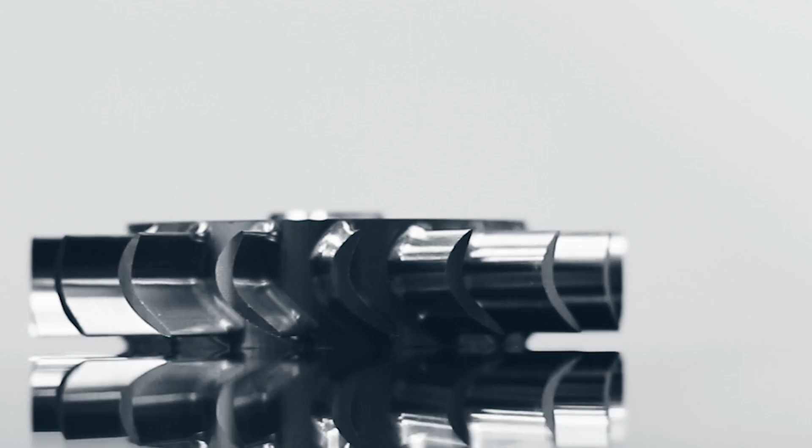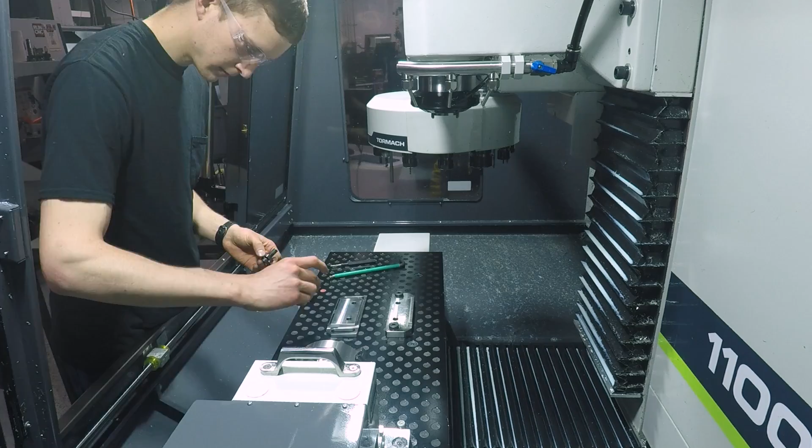For this part, we're starting out with a piece of 304 stainless steel round stock. In order to hold it for the first operation, we're going to dive straight into a set of Saunders Machine Works Mod Vise aluminum soft jaws.

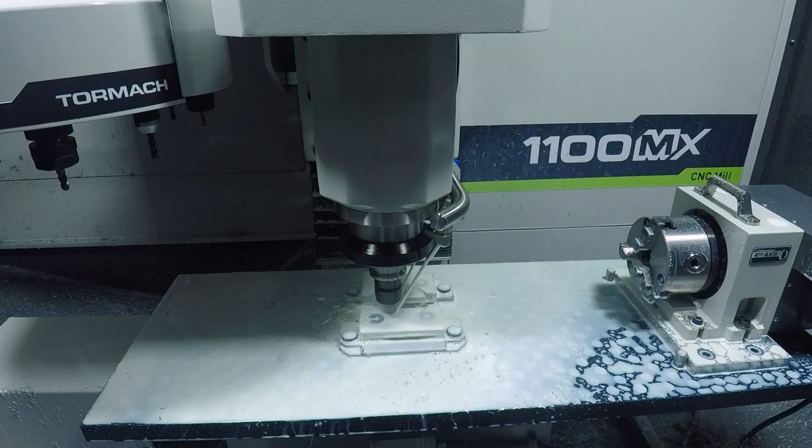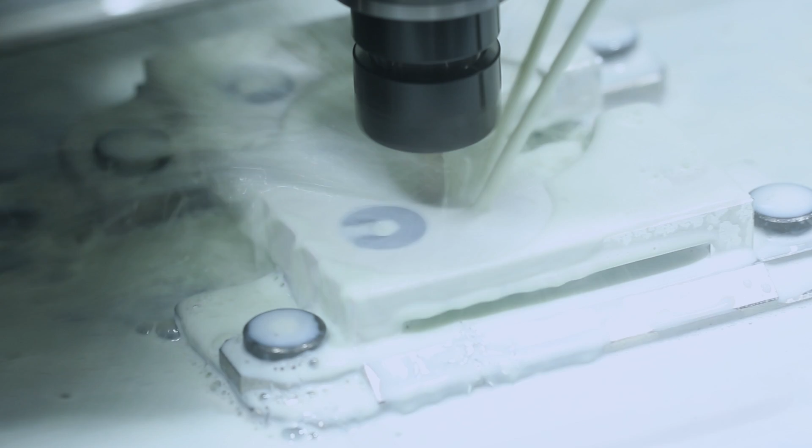So we start out with a 1/4 inch tool conducting a 2D adaptive operation just to clear the area. We follow that up with a 2D pocket to finish the floors. Then we come back with a 2D contour to finish the walls, and a 2D chamfer, just enough to knock the edge off. We're running some pretty conservative aluminum speeds and feeds here, nothing too fancy.

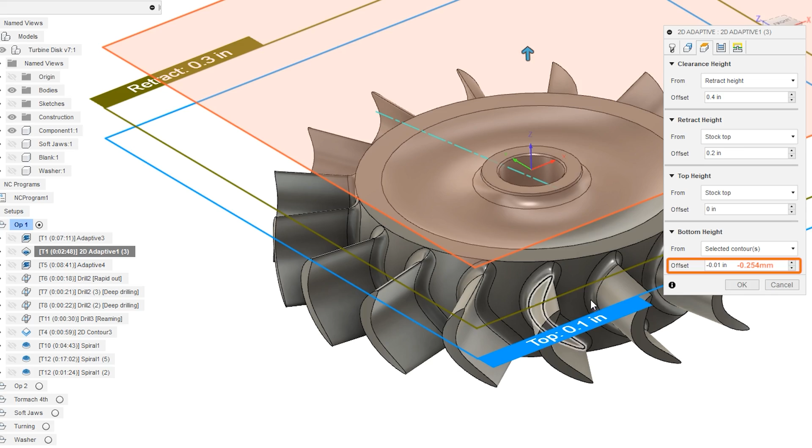For Op 1 of this part, we're going to dive right into a 3D adaptive strategy. Throughout this project, we use a 1/4 inch Lakeshore Carbide roughing end mill. It held up great and really took a beating. After that, we conduct a 2D adaptive operation that we programmed to be 10 thou below this finished edge. The reason why we do this is to give clearance for the finish end mill, and it will make sense when we get there in just a minute.

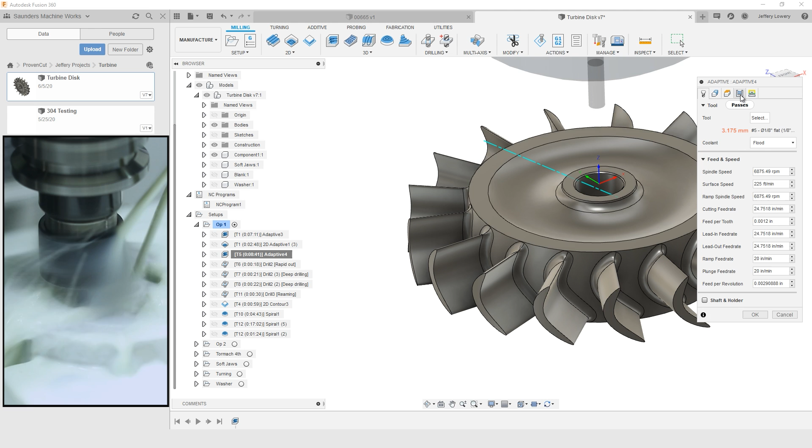Next up, we go with a 3D adaptive strategy for an 1/8 inch end mill. We're going to run this little guy pretty slow and have an optimal load of just 10 thou. We have a programmed axial stock to leave here of just 15 thousandths, but we really need to pay attention to how much is actually going to be left. We'll get to that in a minute too.

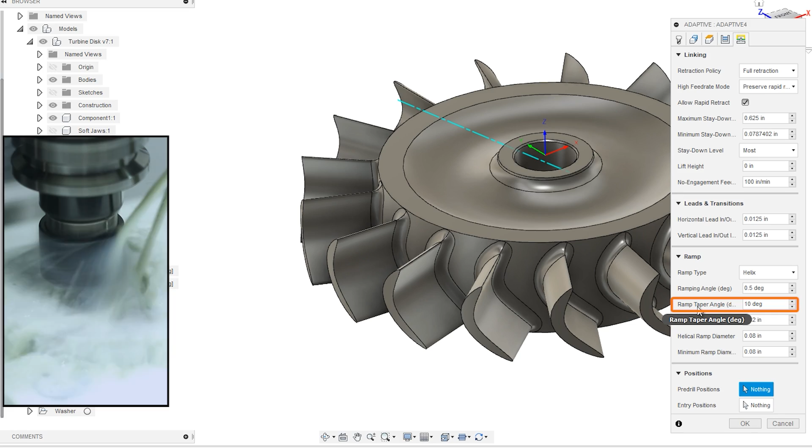An important input to note here is the ramp taper angle. We're machining 304 stainless steel, and 304 does not like to be rubbed on. If the flutes of your end mill are contacting the material without actually making a chip, without actually making a cut, then your end mill is going to wear out very quickly. The material is going to work harden, and it's not going to go well.

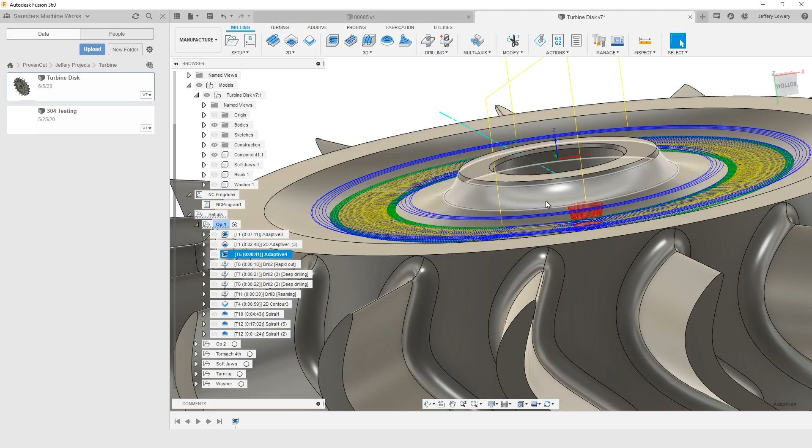Giving a ramp taper angle gives the helix a cone shape. This is really going to help with chip evacuation, prevent your end mill from rubbing, and ultimately create a lot more reliable cut. Next up, we are going to spot the center hole.

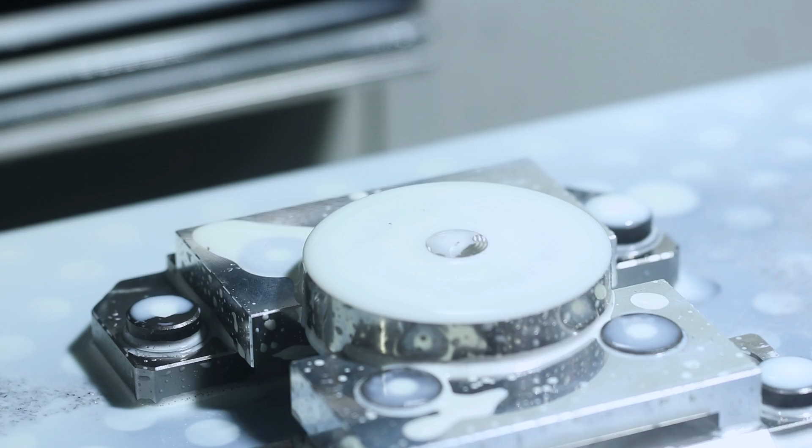For this, we use a 1/4 inch drill mill, and we run it pretty slow. Even with some pretty conservative speeds and feeds, the tip of the tool still chipped. Ultimately, a spot drill or center drill would have done a little bit better, but this got the job done for the one part we were making.

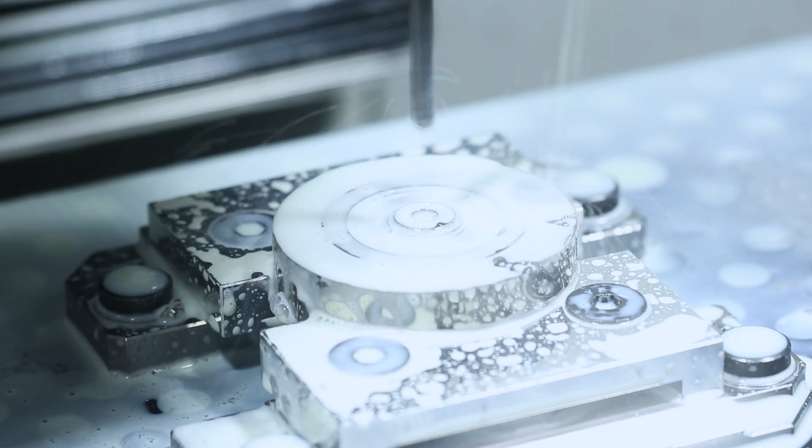For that, we use a carbide 1/4 inch drill running at 150 SFM, feeding at 5 thou per rev to drill all the way through the part. We follow that up with a high-speed steel twist drill, running that a little bit slower at 10 thou per rev, and it worked out great. That being said, I'm not confident high-speed steel is going to last a long time drilling 304 stainless. If we were running a bunch of these, I would certainly want a carbide drill and a carbide reamer.

But we came in with a high-speed steel reamer. We ran it at 1500 RPM, 7.5 inches per minute. The hole came out on size, and I was able to breathe a sigh of relief.

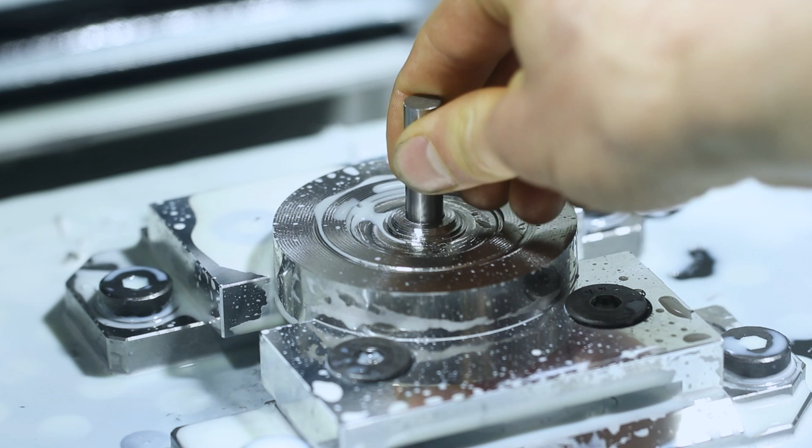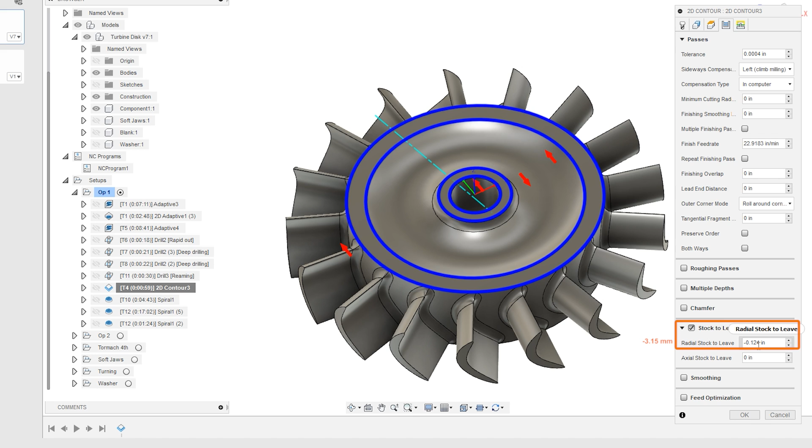So now we get into our first finishing end mill to finish the top surfaces of this part. We decided to use a 2D contour instead of a facing operation to try to avoid some tool marks. We just wanted it to be a continuous toolpath and try to create the smoothest finish possible. Within 2D contour, there's an option to leave stock. You can actually leave a negative value down here as well, up to the radius of your tool.

So we're using a 1/4 inch tool here. If we go -.125, it's red, but -.124 works great. This causes the end mill to run across the top of that face and clean up that top surface, just like we're looking for. So if you remember earlier, we were talking about the additional 2D adaptive strategy in order to make room for our finishing end mill. This here is where we need it.

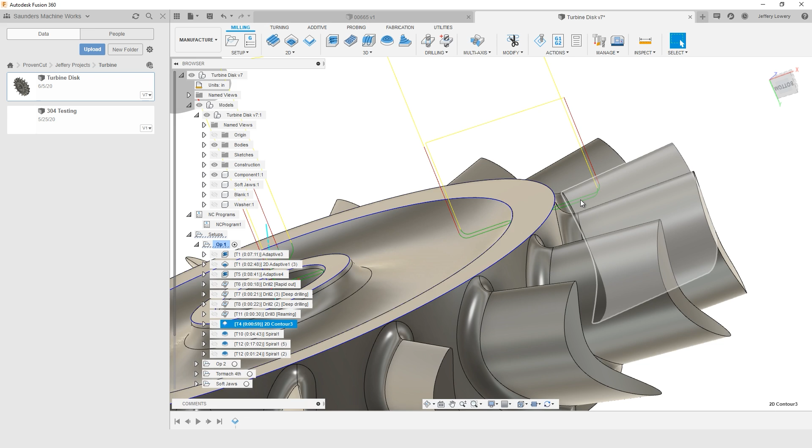This 2D contour toolpath around the outside of the part would have plunged right into the remaining stock if that 2D adaptive hadn't already cleared it. When working with a tough material like 304, you really have to be careful with stuff like that because that will quickly scrap your end mill. So before we jump into this 3D spiral toolpath, we're going to take a minute to look back at the 1/8 inch tool 3D adaptive.

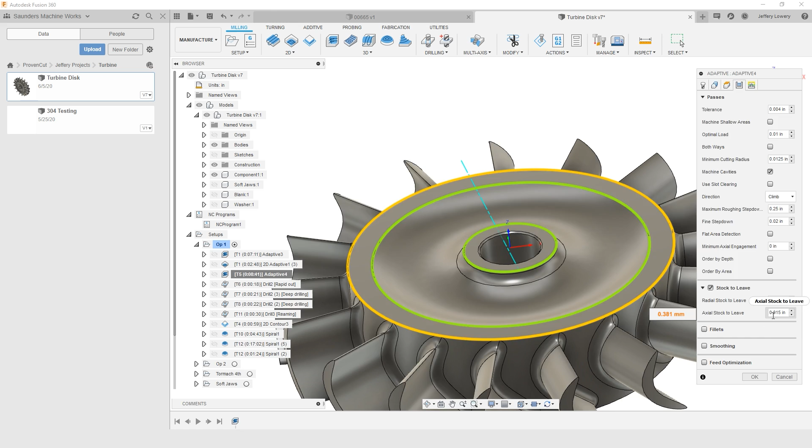Within that, we have 15 thousandths programmed for an axial stock to leave. We are using a square end mill to clear an area with a rounded bottom. So if we look at the simulation up to this point, we can see that the bottom of the stock that is still there is flat. This means that there is a lot more than 15 thousandths of stock still there.

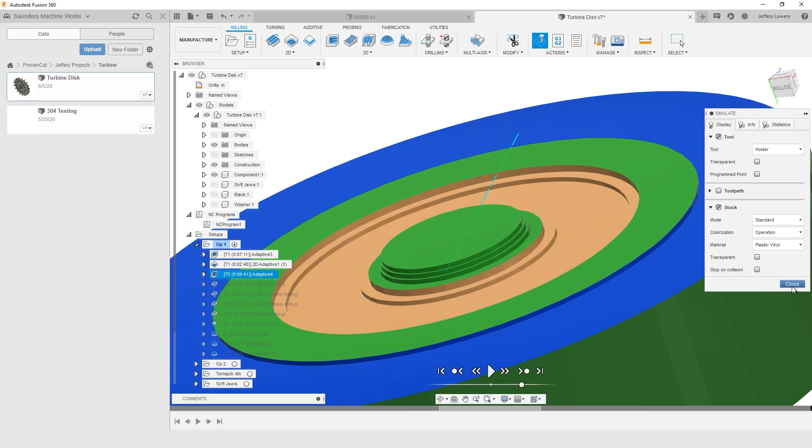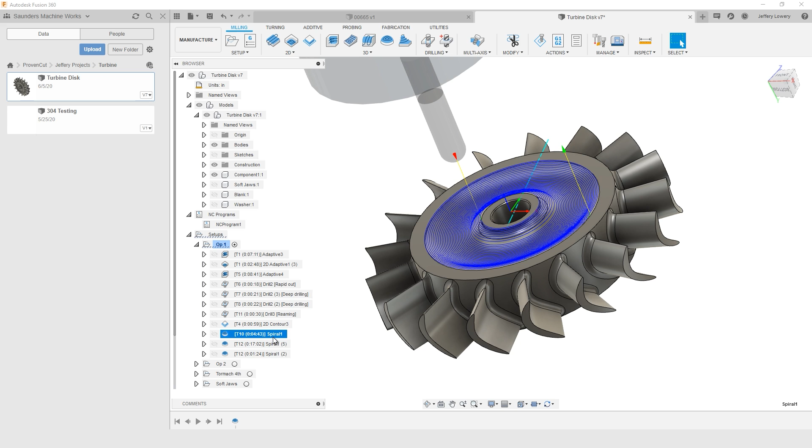Therefore, if we jump straight into our finishing spiral toolpath, we're probably not going to get a very consistent surface finish. It's going to wear out our finishing end mill and ultimately not give the results we're looking for. So we come down with a roughing 3D spiral toolpath. All that means is we're still going to leave some stock. We are using a 1/4 inch 4-flute ball end mill, and we have 15 thousandths programmed for stock to leave.

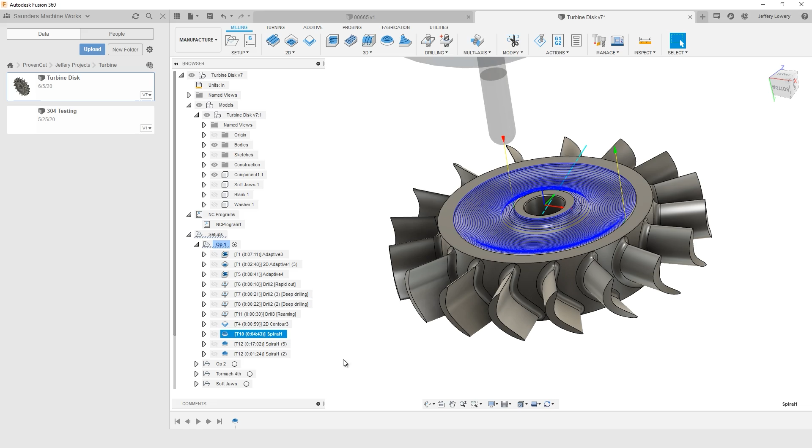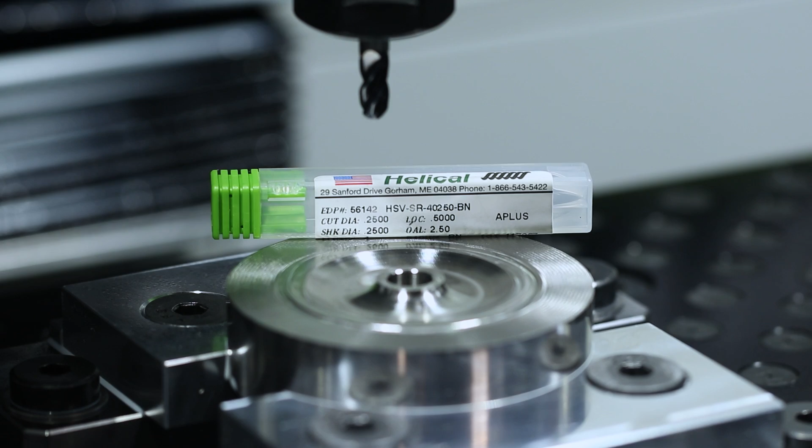This way, the 4-flute ball nose end mill is going to take the beating, clear the remaining material before our 6-flute finishing ball nose end mill comes in to leave the best surface finish possible. So with this initial spiral toolpath, we have a step over programmed of 15 thousandths. But when we get down to our finishing end mill, we're going to go all the way down to a 4 thou step over. We're really happy with the surface finish that this left. These Helical tools performed very well and the part looks great.

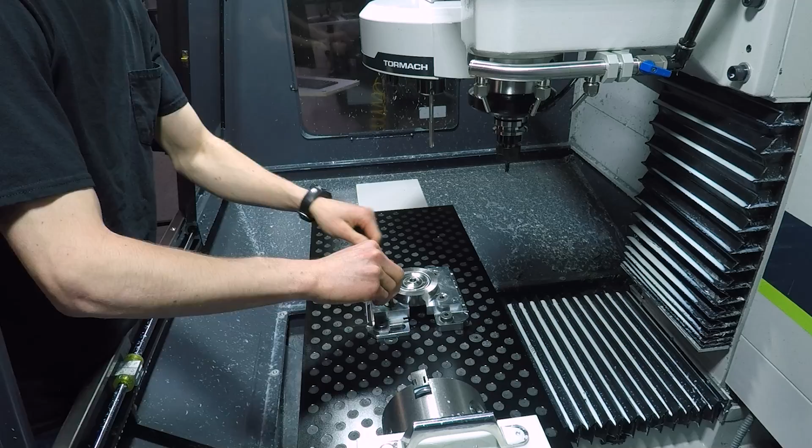Then for our final toolpath of the first operation, we use a 3D spiral toolpath to create the chamfer on the inside hole. We could have used a chamfer tool. It would have been faster, but we already had a ball nose set up. For only doing one part, we decided to go with a spiral toolpath. After the first operation, we're going to turn the part over, and the important part is that our two sides are parallel. Folks, this is where the real fun begins.

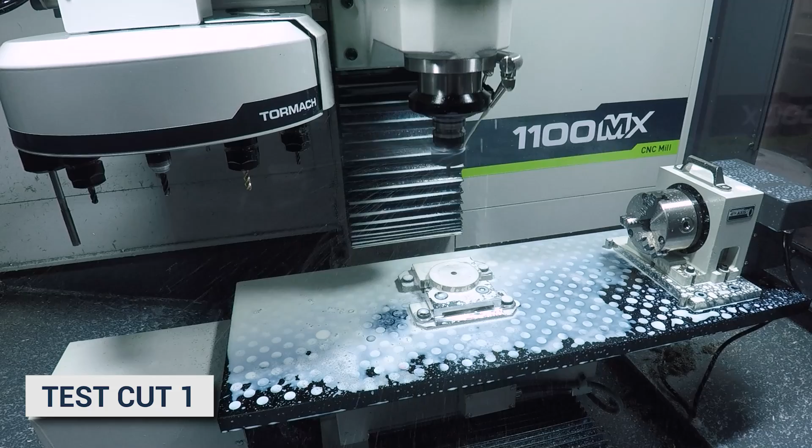So luckily, our piece of round stock was a bit thicker than the final thickness of our part. So we're going to set it up to do a test cut. When I set my Z offset, I set it to where the top of the material would clean up, but the part is still going to be quite a bit thicker than the final dimension. So after that end mill runs, we get out our 0 to 1 micrometer and we measure 2 points. Ideally, these two measurements would come out to be exactly the same.

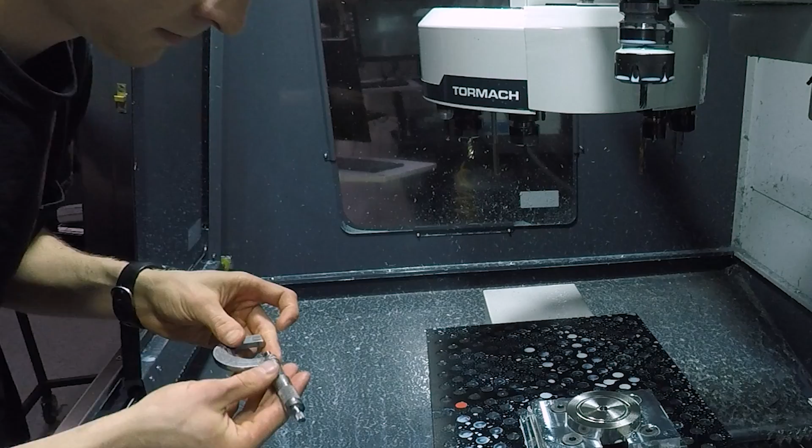Here, the measurement I took was about 2 thousandths difference, and for what this part is, that is not good enough. I think that the root of this problem started clear back in my setup for Operation 1. I seated it with a hammer. Ultimately, that's pushing the rough saw cut edge against the bottom of my soft jaws. Then the top machined surface is not going to be perfectly perpendicular with the cylinder of my raw stock, and I think it made it that much more difficult to set up for Operation number 2.

After we find that the parallelism is out, the fun game begins of trying to get it back. I take the part out of the mod vise, clean everything off, make sure there aren't any chips causing problems, get it back in, seat it, and then we're going to get out an indicator. I run an indicator across the top of the part just to start to try to understand what we're looking at, what we're working with.

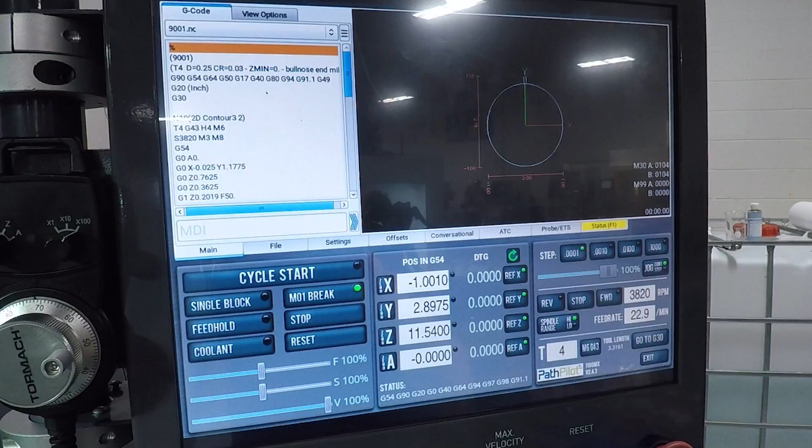Once we're ready to take our second test cut, I'm going to adjust the Z offset the same amount that the finishing end mill originally took. So if we look in our original 3D adaptive strategy, we were leaving 5 thousandths of axial stock. Therefore, when we adjust our Z offset, we're going to adjust it by 5 thousandths again. The finishing end mill is going to experience the same cutting pressure and hopefully give nice repeatable results.

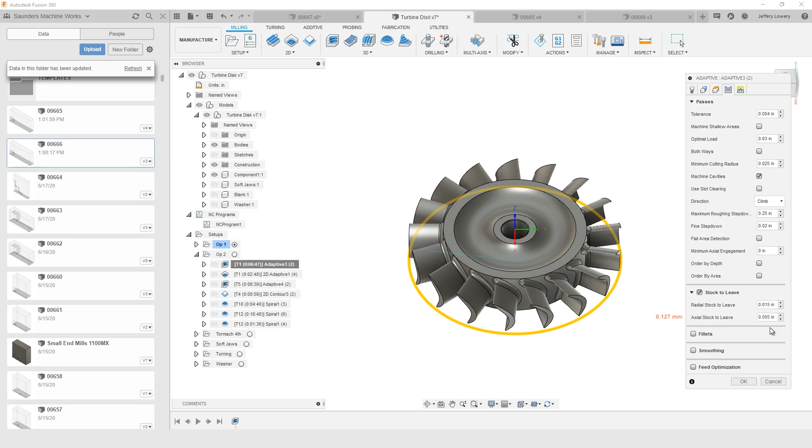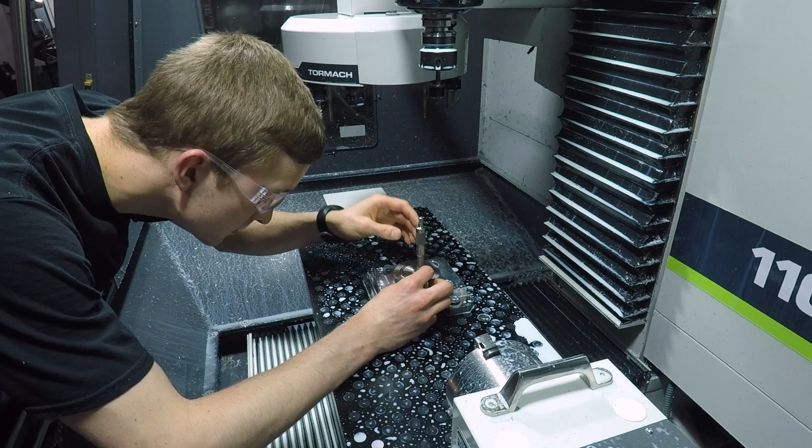Going into test cut number 2, I thought we were going to get the parallelism back to pretty close, but I was wrong. After I saw that it was still out by almost 0.02, I knew that for my next try, I was going to need to be a lot more deliberate about what I was seeing with an indicator. Therefore, I went ahead and pulled the part out again. I took measurements in 4 different spots around the part. I wrote them down, cleaned everything off, put it back into the mod vise, and then started indicating.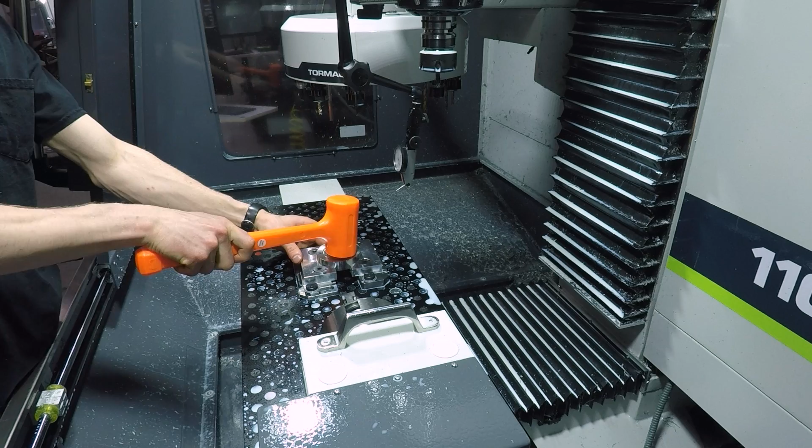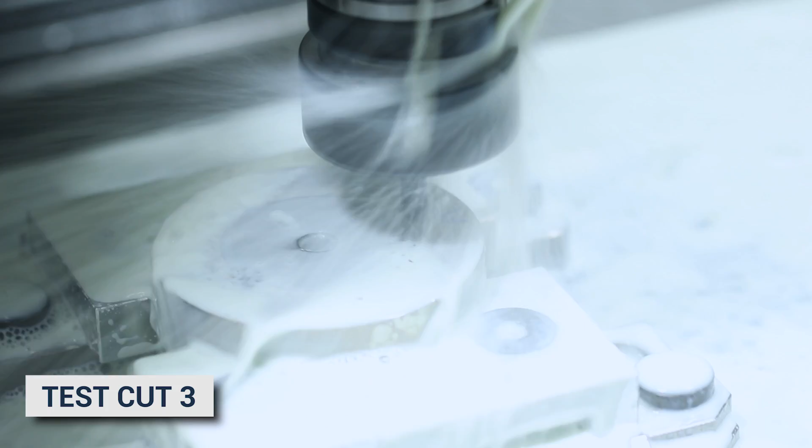I very carefully, very deliberately tapped on the part with a hammer in different spots to get the indicator to read high in the areas that were thick. I was able to get this dialed in to what I wanted to see, adjust the Z offset by 0.005 again, come back with another test cut. When I took 2 measurements after this 3rd test cut, the reading on the micrometer was almost exactly the same.

Just to double check myself, I went ahead and grabbed a different micrometer to take a measurement. I got the same reading, and from there I subtracted where I was from the overall thickness of the part on the drawing, and then used that number to adjust my Z offset and go ahead to dive into operation number 2. Operation number 2 uses the same programming techniques, the same strategies as operation number 1.

The tools held up, the surface finishes looked great, and overall we were very happy with how the part turned out. In the end, we were able to get the parallelism of this part to within 0.0005. So just for a reference, that's roughly 1/4 the thickness of a human hair.

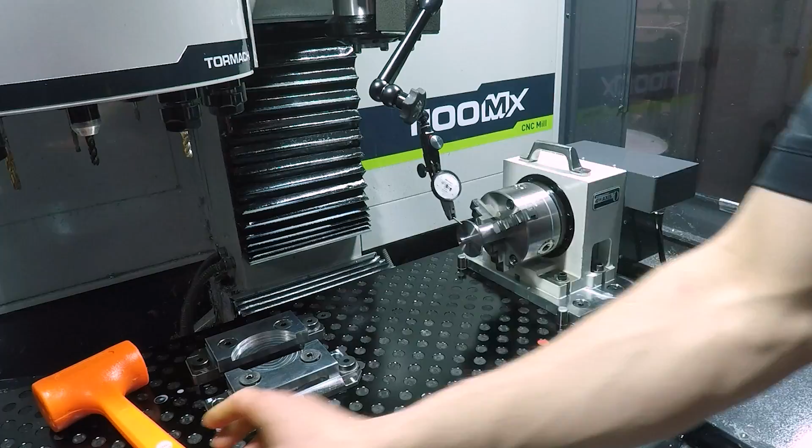After Op 2 is complete, we are ready to get this part up in the 4th axis. So we made a little fixture for this off camera, but the trick is getting the fixture to spin true in the 4th axis. So a tenths indicator, a hammer, and a little bit of patience goes a long ways.

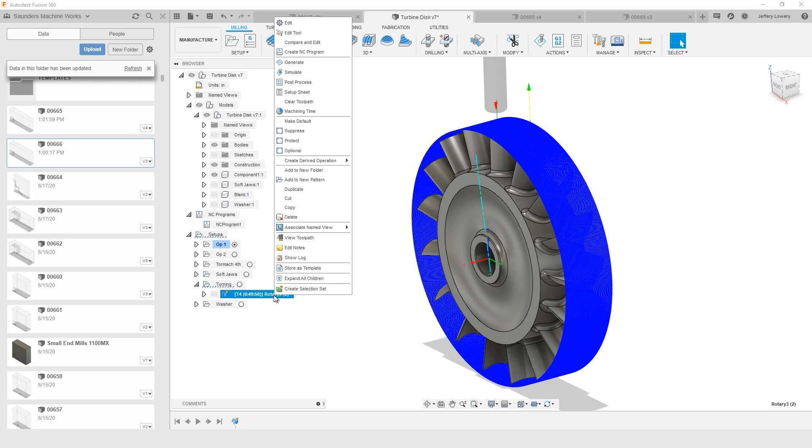In order to make the outside diameter of this part as round as possible, we decided to turn it in a mill. That is right, folks. We are turning the part in the mill. Fusion 360 has an awesome toolpath for this called Rotary. Rotary toolpath gives you the option to make a spiral toolpath of which you can adjust the step over, and it left a beautiful surface finish.

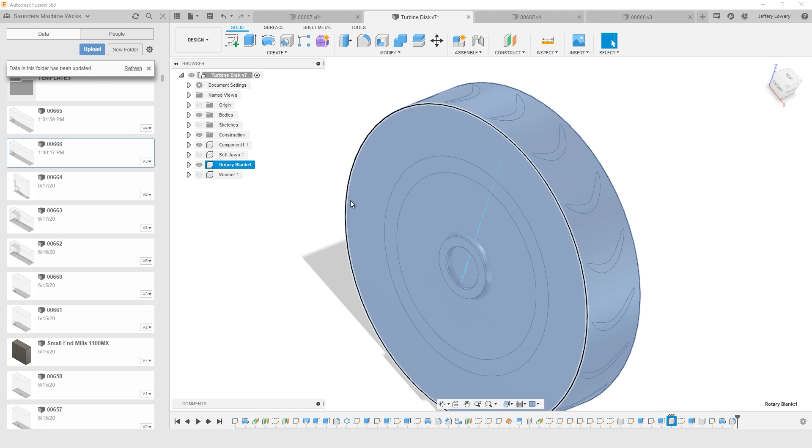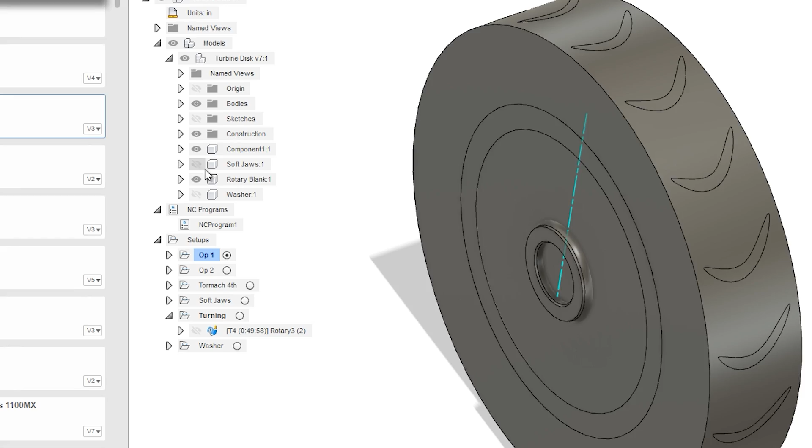In order to get Rotary to create the toolpath that I was looking for, we had to create a new component in the design side of Fusion. So we called this Rotary blank, and it is essentially just a solid disc to the finished diameter of our part. Then on the manufacture side, we created a new setup. Within this setup for the model, we selected our Rotary blank. A great feature within Fusion is I can now hide that model, and it essentially still looks the same as if I'm working directly with the actual 3D model of my part.

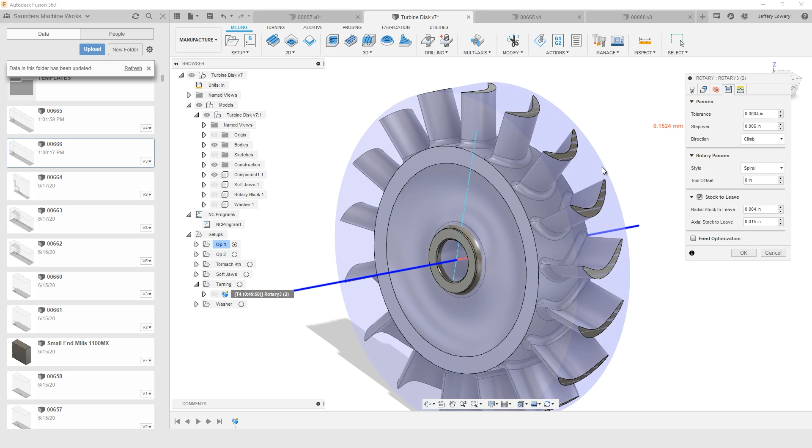So we did some experimentation and decided that a step over of 0.006 would give us a good surface finish and still keep our cycle time at a pretty reasonable rate of just 50 minutes. After we get the work coordinate system set up on this part, dialed in, we are still going to take a test cut. Folks, anytime you're trying to hold tight tolerances, test cuts are your best friend. So we take the test cut, we measure it, we see where we're at, we know where we're supposed to be, we can make an adjustment from there.

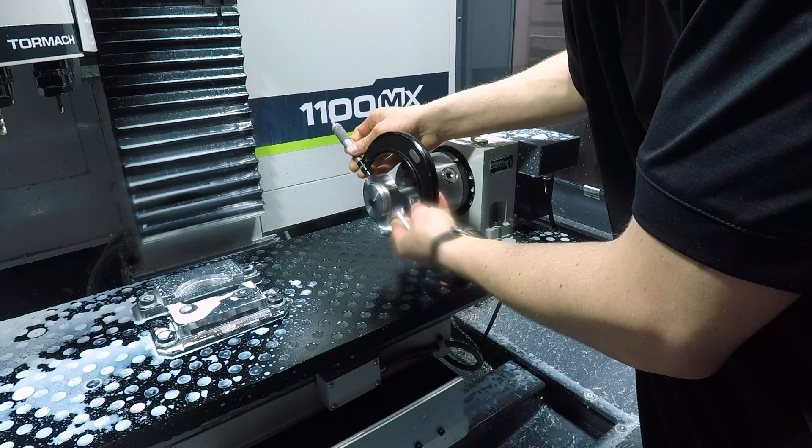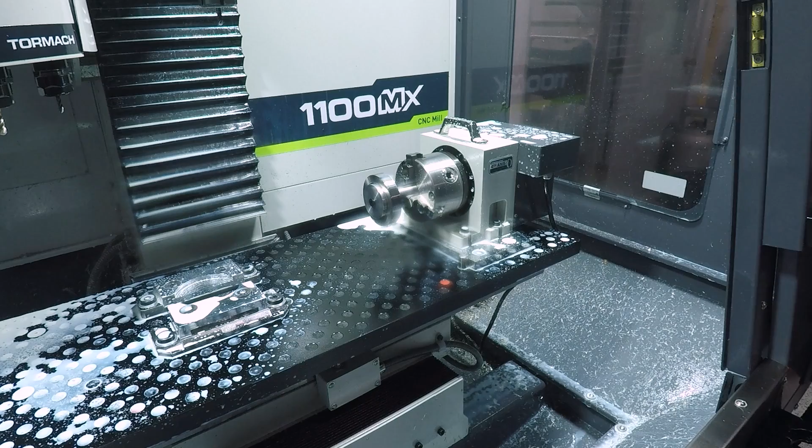With this setup, I was changing the diameter of our part with the stock to leave of the Rotary toolpath. We got it dialed in and hit our tolerance right on. By spinning the part in the 4th axis like we did, the circularity of it is right on. If you measure this with a micrometer, multiple points around that outside diameter, you will get the same reading. Folks, this 4th axis is awesome.

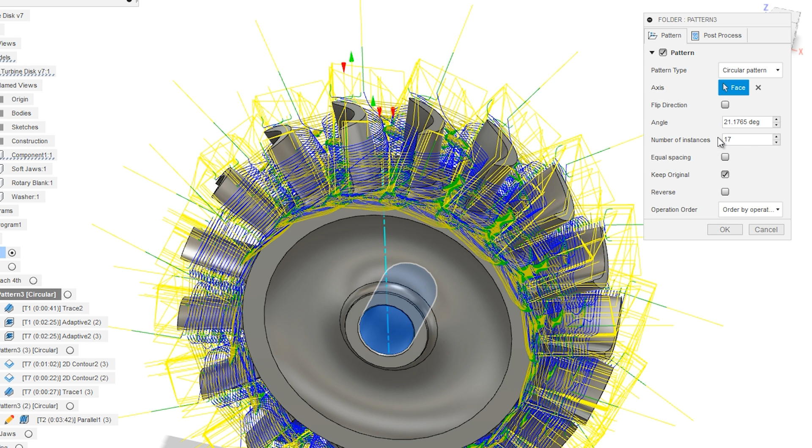After the Rotary toolpath, we are ready to jump into the biggest challenge of this part, machining these little fins. Within Fusion, we've programmed this as a circular pattern. You can get to that under Setup and New Pattern. Within a pattern, you have the option to select a circular pattern, an axis of rotation, an angle of separation, and a number of instances. This worked out really well for what we were trying to do here.

So we start out with our 1/4 inch Lakeshore Carbide roughing end mill. We're going to slot in between these fins in order to initially clear some material. I originally tried just coming in with an adaptive strategy, and that long length of cut was giving me a lot of problems and making some horrible noises.

In order to conduct a slotting operation between each one of these fins, we start out by creating a sketch and an axis of which we want our tool to be oriented. So we come over here with a trace operation, and for that trace geometry, we select the sketch, and then we have a tool orientation option to where we can select the axes that we created for our Z, and then we just select the inside cylinder for our X axis.

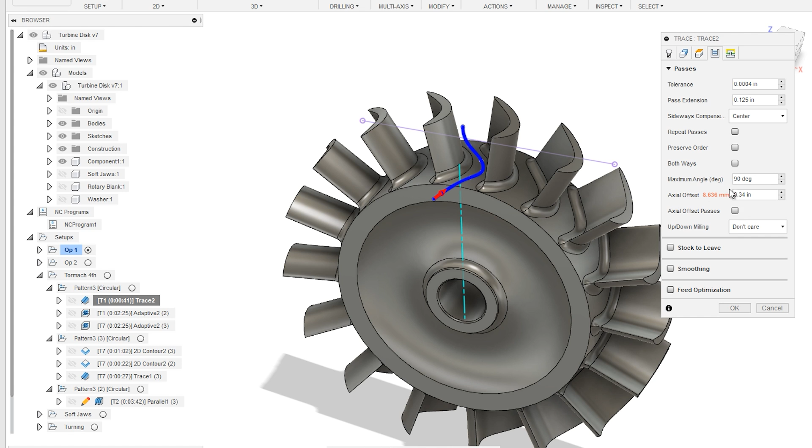From there, we use the axial offset to adjust the toolpath just right to where we're removing as much material as possible without getting into the part. Under our simulation, we can make our stock transparent, and it really helps get a good idea of where we're at.

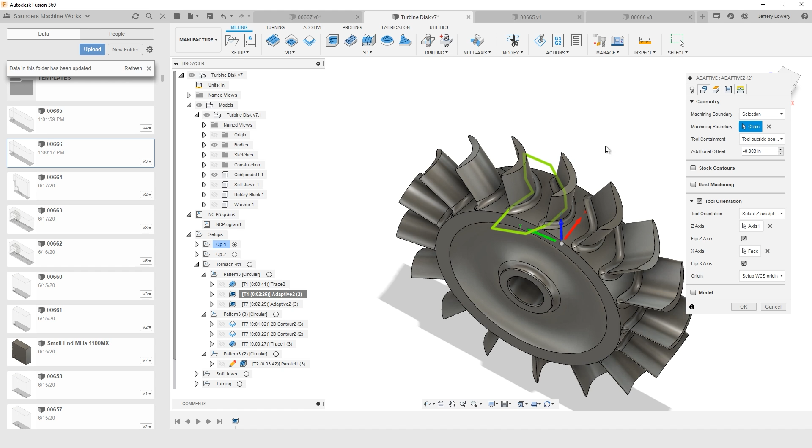Next up, we use the same tool to conduct a 3D adaptive strategy where we've created a sketch for our machining boundary that covers the area in between the two fins. We have the same tool orientation option to where we can select the same axes and get a great looking toolpath.

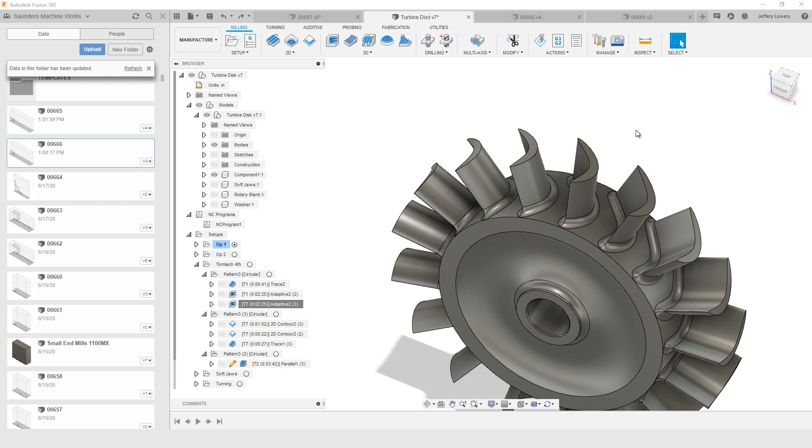After the 3D adaptive with the 1/4 inch tool, we follow that up with a 3D adaptive with a 3/16 inch tool. When you look at the simulation for our 1/4 inch tool, we can clearly see that not all of the material is removed.

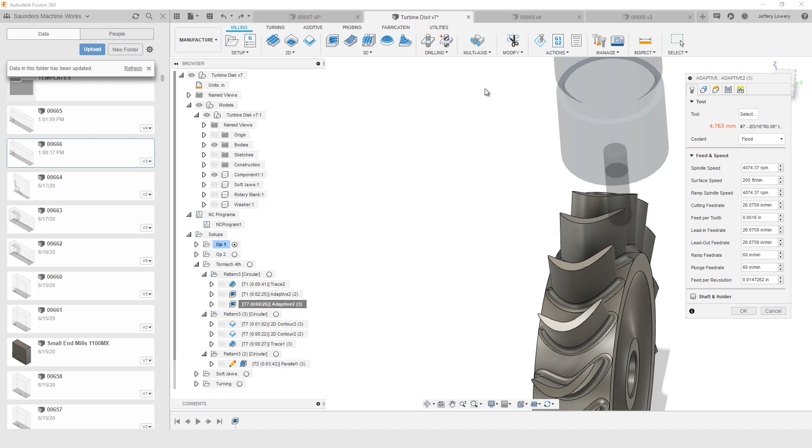We can then come back with a 3/16 inch tool, the same strategy, the same geometry, but we're able to select rest machining from previous operations. 3D Adaptive is so intelligent that it can look at your previous operations and create an appropriate toolpath based off what still needs to be removed.

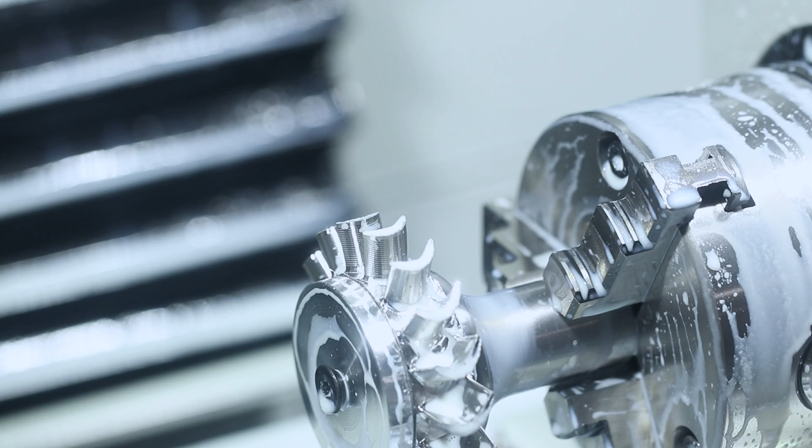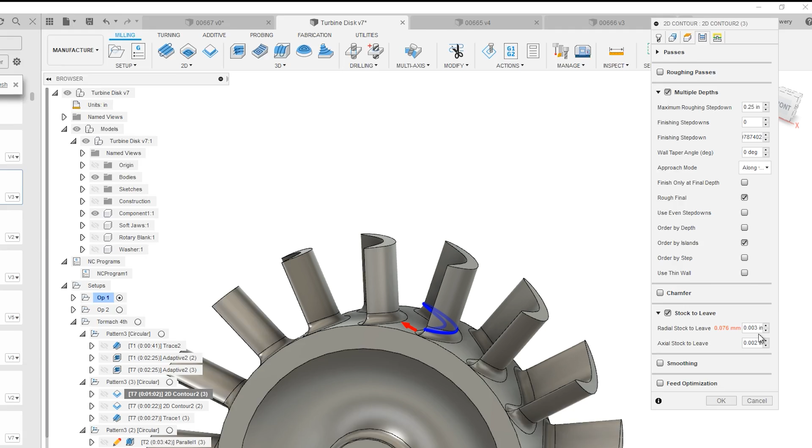After the 3/16 adaptive strategy, we are ready to jump into finishing these fins. We're going to orient the tool parallel to the fin itself by selecting the side of the fin for our Z axis under tool orientation. So we're going to start out with a 2D contour and still leave a radial stock of 3/1000. We're doing this to clean up the rest of the material left from the adaptive toolpaths. That way our finishing tool experiences a nice consistent tool pressure and will leave the best finish possible.

We also found that this first 2D contour was best conducted with 2 step downs, so we're not taking quite as long of an axial depth of cut. Because of the diameter of this tool, the relatively long length of cut, and the properties of 304 stainless steel, this was fairly difficult to get a good surface finish. I did some testing and I was pretty confident about our speeds and feeds recipe going into this, but the geometry of the part gave us some trouble.

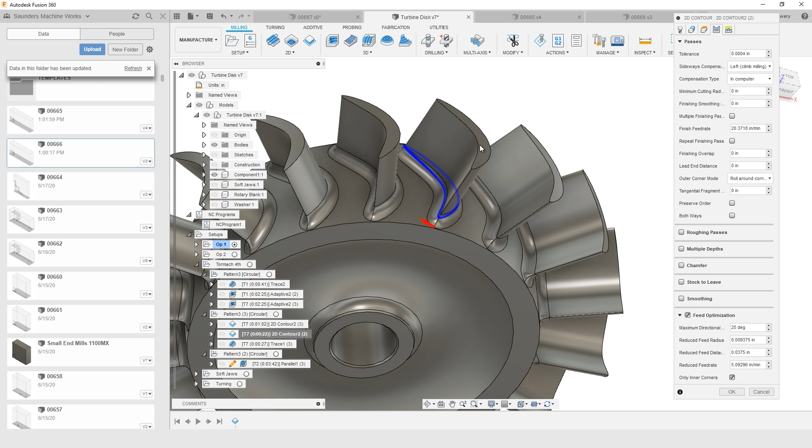So on the inside radius of that fin, the end mill experiences a slightly higher chip load and it was causing a small amount of chatter. If I could go back and do it again, I would spend some time experimenting with the feed optimization feature and try to get rid of that small chatter. Overall, the finish still looks great and we'll remember that for next time.

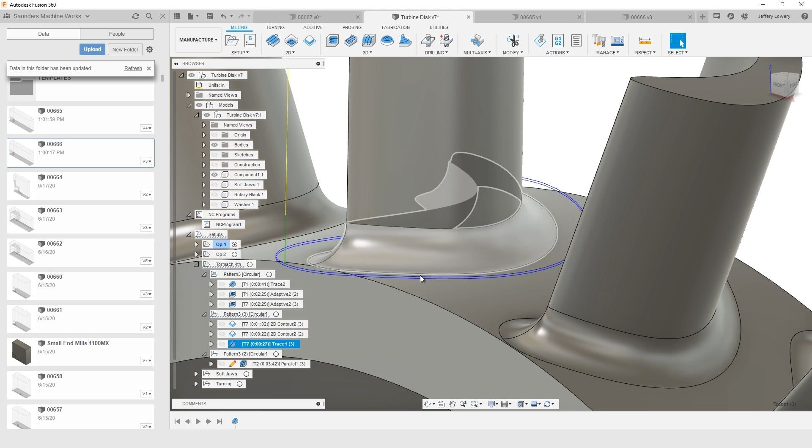After the 2D contour, we come back with a 2D trace operation in order to accurately machine the bottom radius around the flange. As you can see, a 2D toolpath is just not going to accurately machine these features. Under a trace operation, we selected the bottom edge of that radius for the curve selection. This created a toolpath that accurately machined that radius around the bottom of the fin. Again, we got just a small amount of chatter on that inside radius, but overall we were very happy with the surface finish on these fins.

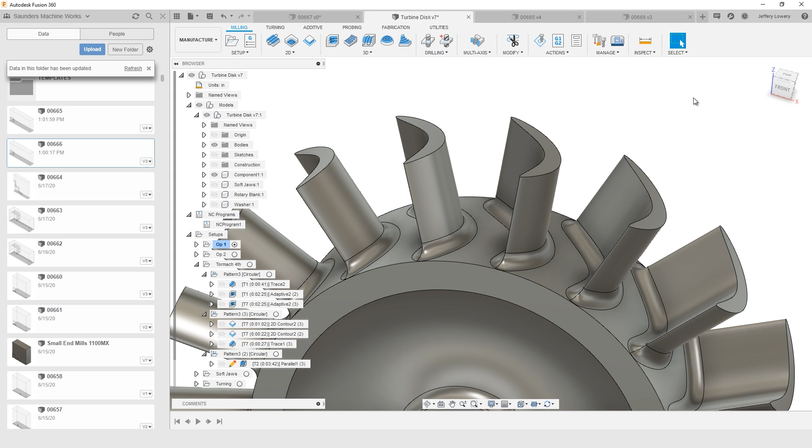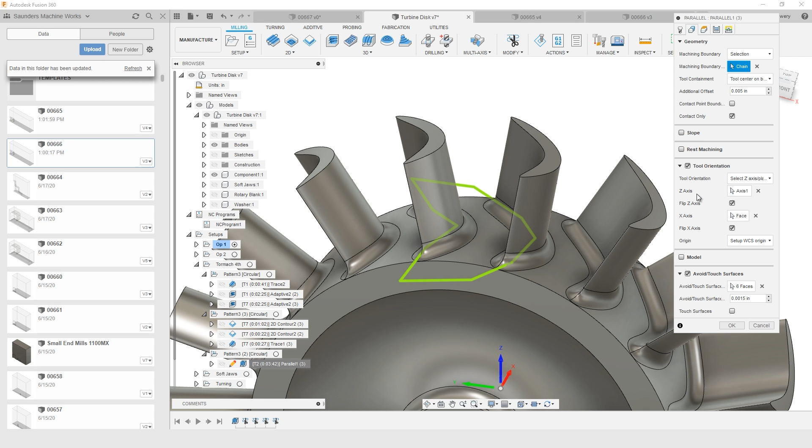Last but certainly not least, we dive into the 3D surfacing of this part between the fins. In order to do so, we use a 3D parallel toolpath and 1/8 inch ball nose 4-flute end mill. We were able to use the same sketch and the same axes for tool orientation that we used earlier for our adaptive toolpath. In order to get this parallel toolpath to look exactly the way we wanted, we were able to use one of Fusion's latest updates, Toolpath Trim.

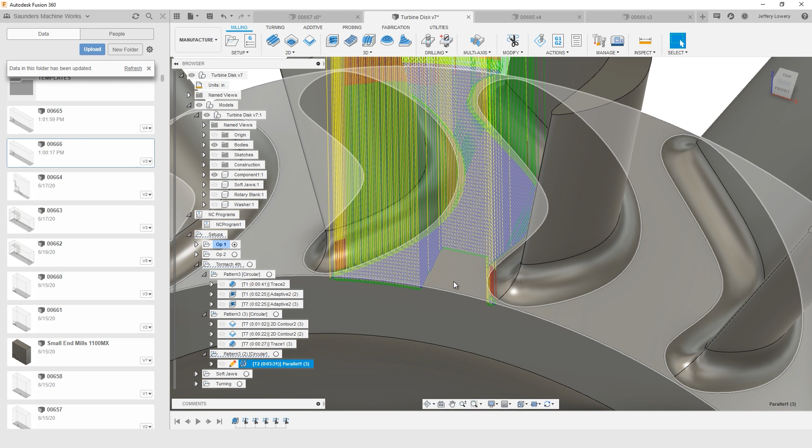What this allows you to do is to define a boundary for your toolpath to avoid. So we'll just do a little example here. We sketch a boundary, hit OK, the toolpath regenerates and avoids that area. This is really helpful to really get the toolpath dialed in just the way you want it. So we'll hit Control Z to undo that and then talk about why we decided on 3D parallel.

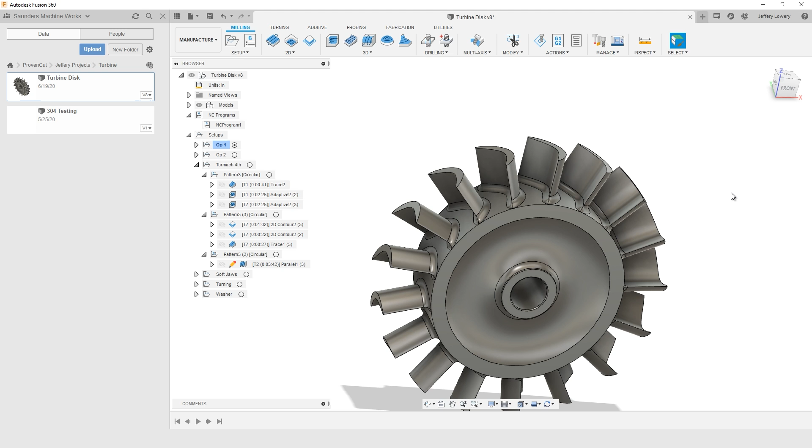While conducting tests for this part, I experimented with several different 3D toolpaths. Ultimately, I found that reducing the quantity of axes moving at any given time was going to give the best surface finish possible. So folks, even if you're dealing with a much more expensive, higher end machine, the machine is still not perfect. So it is generally a good programming practice to choose a toolpath that reduces the number of axes moving. For this geometry, we can clearly see that 3D parallel does that for us by watching our simulation.

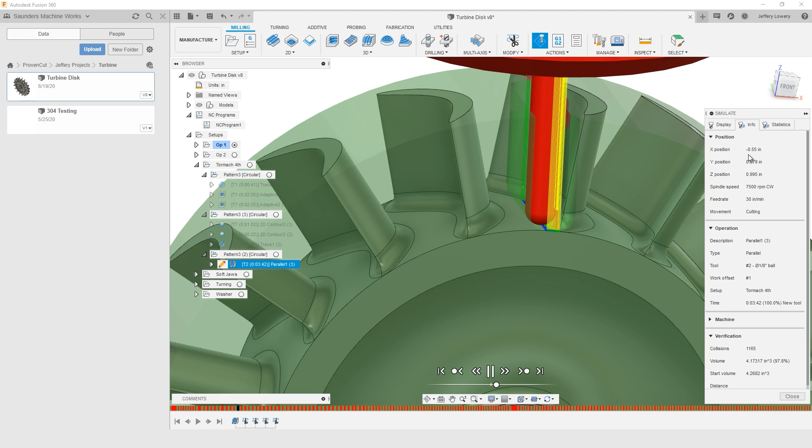The toolpath is moving multiple axes as it comes up and over and re-enters the cut. But we can see here under our Info tab, we'll slow the simulation down and play. It is only the x-axis that is moving while the tool is in the cut. Ultimately, this worked great. It left a beautiful surface finish, and we are very happy with how the part looks.

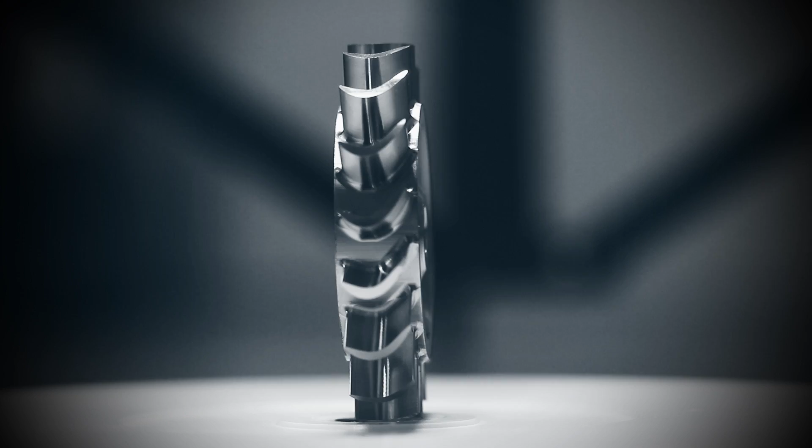I thought Jeffrey did an absolutely awesome job, not only on the part, but on the process and showing how he got to that end result. It's also a great example of it's the carpenter, not the tools. I was blown away with how this part came out on the MX, and it's what Jeffrey spent a lot of his time doing for ProvenCut, showing what you can do with a machine tool, whether it's a small benchtop hobby router all the way up to 20,000 pound vertical machine.